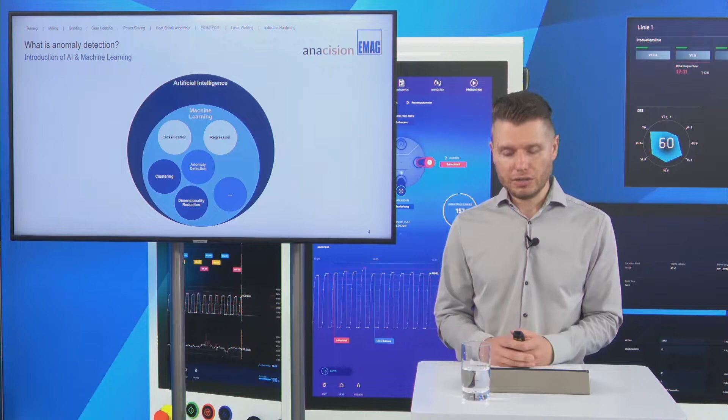Before we dive deeper into today's topic, we first have to clarify some terms related to anomaly detection, in case you don't know them already. At the very top, we have AI. AI mainly deals with recreating structures of human intelligence, for example, reasoning or perception. Within AI, we have the topic machine learning, which is about programming computers in a way so that they can learn from data. Within machine learning, we have various approaches, and one of them is anomaly detection, our topic today.

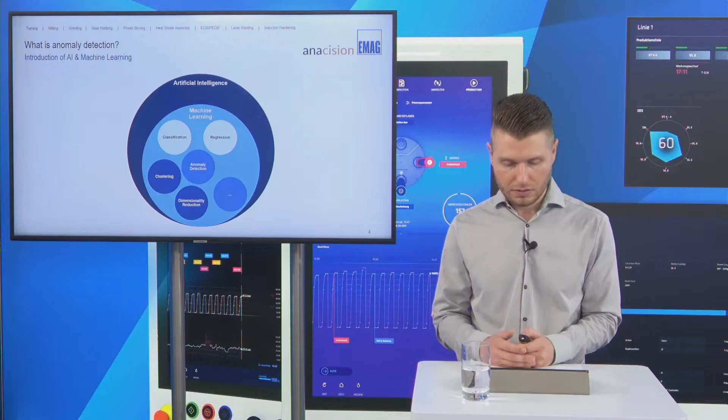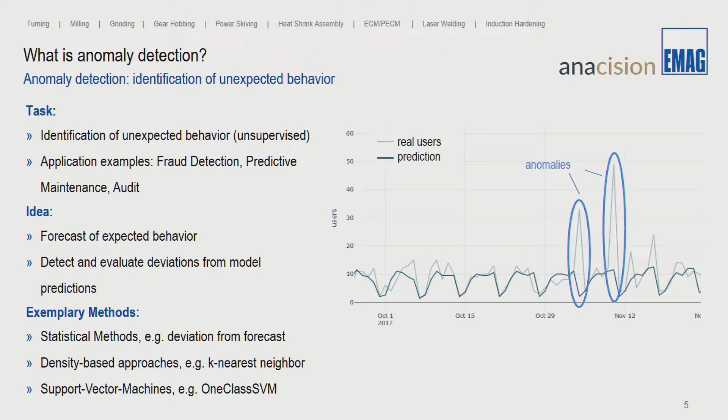But what is anomaly detection about? Anomaly detection mainly deals with detecting unexpected behavior. The idea behind it is that we want to model and forecast expected behavior and detect deviations from it. On the right, you can see an example showing the actual numbers of users of a website and the predicted ones. And you can see here two anomalies where the actual number of users is far higher than the predicted ones. This is considered an anomaly. The reason in this example could be an attention-getting social media post, which led interested users to the website.

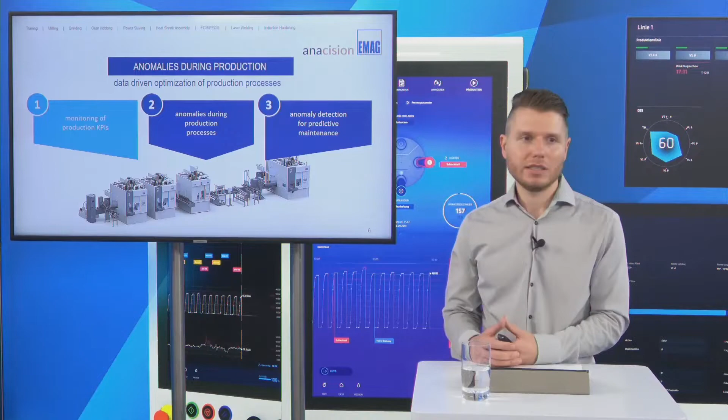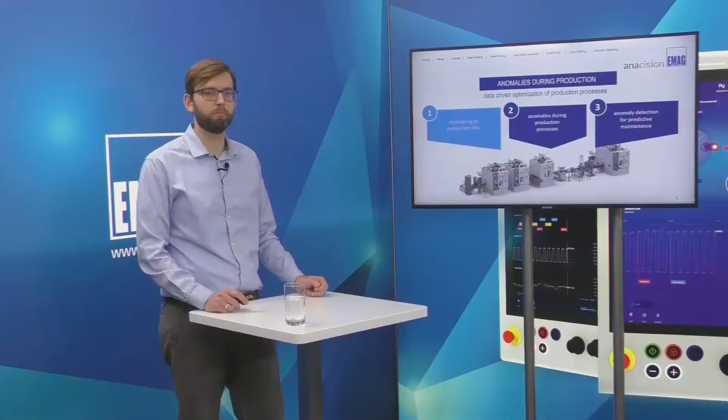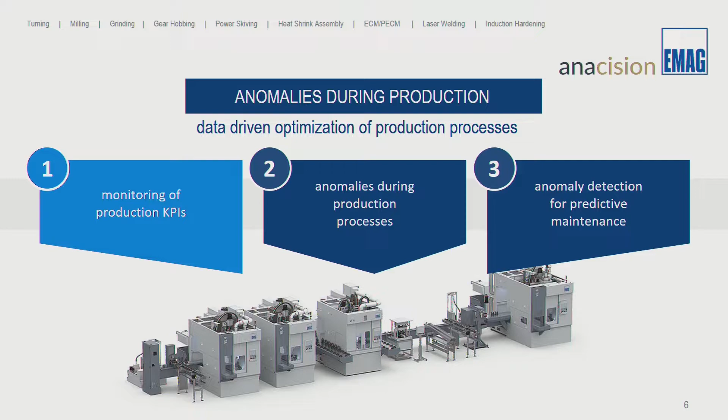Now I hand over to my colleague Andreas, who will cover the topics monitoring of production KPIs and anomalies during production processes. Afterwards, I will go on with anomaly detection for predictive maintenance. Thanks, Patrick. As Patrick suggested, we are now going a bit from the theory more into practice. So how you could use anomaly detection methods in practice in production to leverage your full optimization potential. Within this topic, we will have a look at 3 different areas. First of all, we look at monitoring of production KPIs. Then we go deeper into the production process and how you can use anomaly detection in there. And last of all, we continue with predictive maintenance approaches.

To start with, we want to introduce the common KPIs that are used in production in order to analyze the efficiency of production plants and lines. Often we talk about the cycle times or the takt time of each individual part. The part count is obviously very important, and also the target part count within a shift, for example. The quality and rejection rate of the parts, and also the machine downtime is often measured and analyzed. And one of the most important factors in production is obviously the OEE.

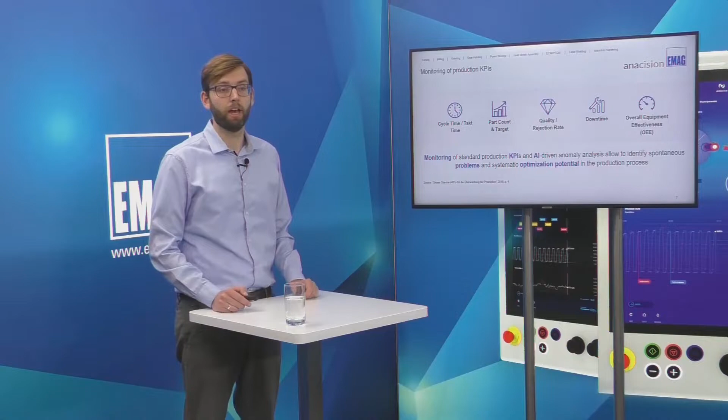Often these factors are analyzed only per shift, per day, or maybe within a week, and not in great detail. But what we want to show you in the next few slides is that if you go deeper and analyze them in more detail, using, for example, AI-driven methods on top, then you can really use these KPIs to identify problems or optimization potential in your production line, and leverage this to optimize your production processes.

So we, as EMAG, already have some software tools that can help you to calculate these KPIs directly from machine data. We offer different data apps that, for example, calculate the part quantity and also make a part quantity forecast, so which quantity you will achieve within the shift with the different production speeds. We have an OEE calculation monitor, and we also have tools that directly calculate the cycle times.

At the current stage, for example, we can visualize the data from these apps in dashboards, so that a worker in the line can directly see these effects and has transparency about his behavior, and can react, for example, if the production speed is too low. And this is also a good interface to alarm different anomalies in production processes.

We have our first question, Andreas. Perfect. Do you also offer systems which analyze anomalies live and take actions immediately?

Yes, so these apps which we just discussed, we use machine data to directly calculate KPIs first. And in some of these apps, for example, a cycle time monitor, we can directly identify anomalous takt times, for example, if the production process is too slow. We didn't do it yet in the process, but with dashboards and also with smart devices, we could alarm those so that the worker could react and see what's wrong in the machine. So yes, we are there already.

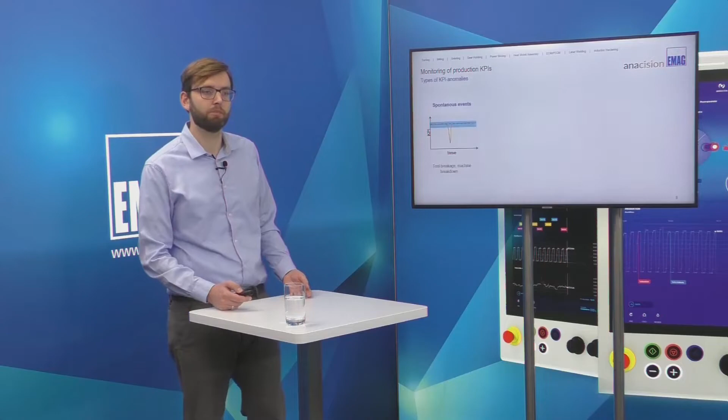Yeah. Thank you. Okay. We have these apps to calculate KPIs, but on the next step, the question is, what kind of anomalies are we expecting in practice? There are different types of KPI anomalies that we are expecting. For example, there could be spontaneous events, which could be an OEE drop when you have a tool breakage or a machine breakdown, then the machine stands still. Obviously, your OEE goes down, so it's like a one-time event.

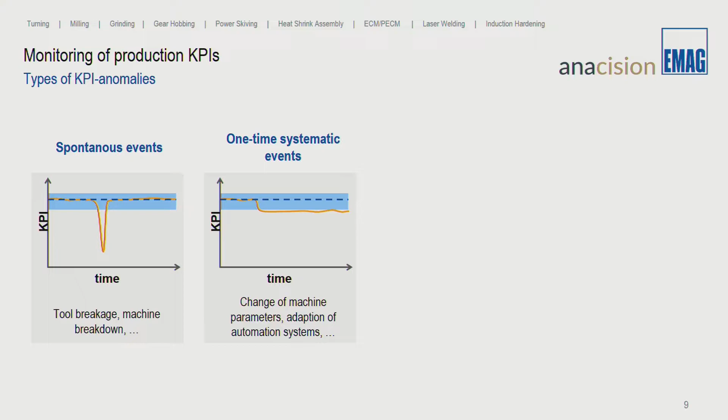But you could also have one-time systematic events. Meaning, if, for example, a worker is changing the program of the machine, or you have an adaptation of your automation system, you can either improve your productivity, or in some cases the productivity can decrease. And often this also remains unobserved because the changes happen in such a small detail that nobody can detect it without data analysis methods.

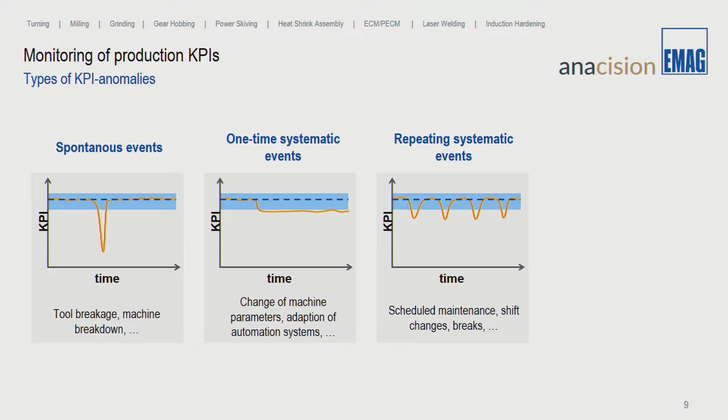Another thing which we are expecting are repeating systematic events. This could be, for example, through scheduled maintenance during a week. This could be caused by shift changes, by breaks, by shop floor meetings, and this could all have an effect on productivity.

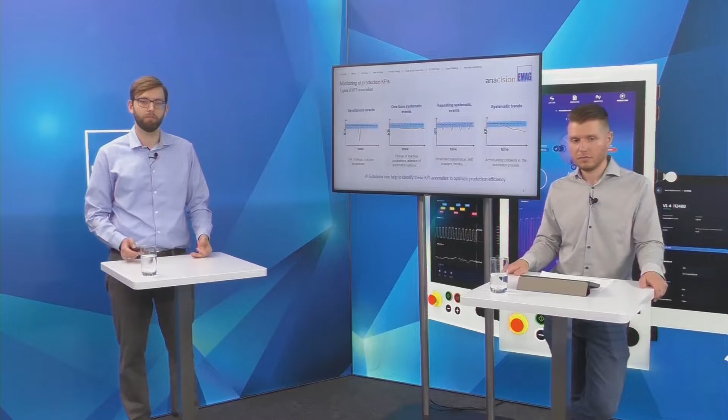A fourth example of a pattern that we might expect or can observe are systematic trends. It could also occur in KPIs, for example, if you have accumulating problems in an automation process. But most of the time, we expect such a pattern when we talk about machine wear or tool wear, when some accumulating process leads to increasing damage. And our goal now is to identify these patterns in the KPI data with advanced analysis to identify optimization potential.

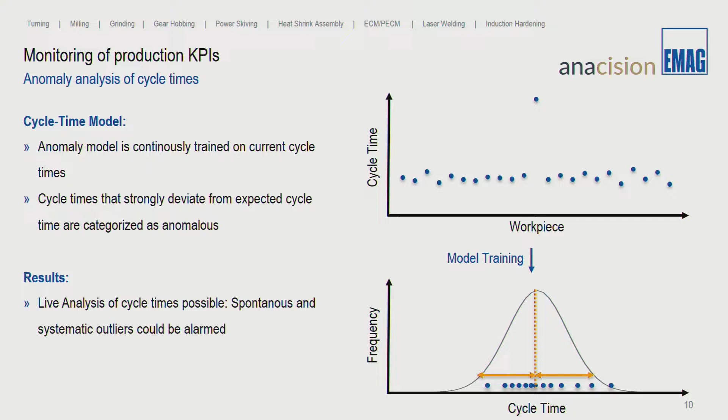So in this previously mentioned cycle time app, we train a statistical model which, based on the machine data, automatically calculates the expected takt time and also the expected deviation of the takt time. Then we can apply it on our measured data in the live system. Here we have our expected takt time and the area of deviation we expect. All the takt times in between we don't have to worry about. But if we find a takt time outside, it could be an important issue that might need to be alarmed. For example, in this case, there could be no parts available.

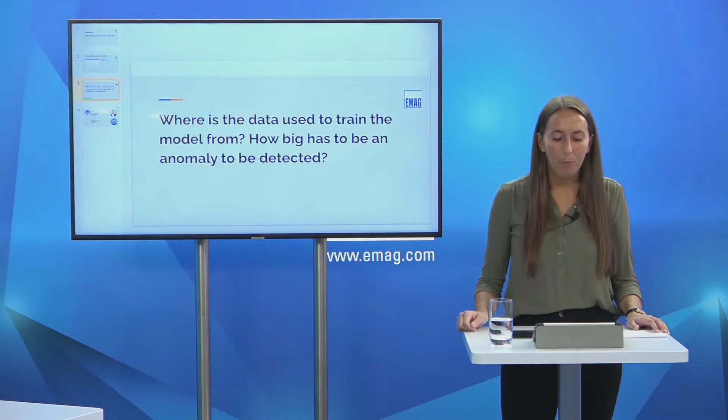Where is the data used to train the model from? How big has an anomaly to be to be detected?

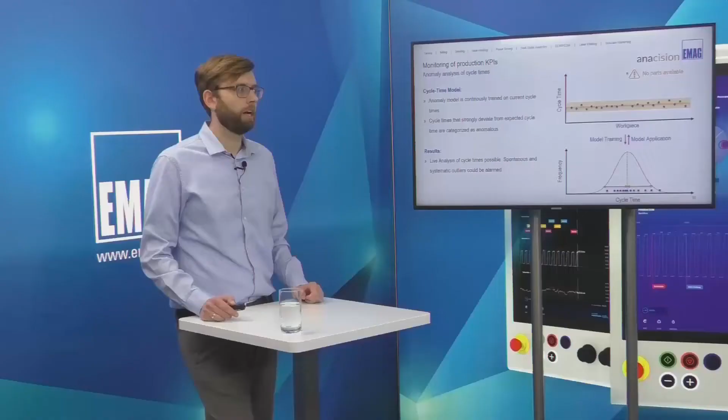The data for the apps we just discussed is coming directly from the machine. It's collected by the EMAG IoT gateway, the EDNA IoT Core. So we calculate the KPIs directly from the machine data. In theory, we could also use KPI data from, for example, MES systems, but this is how we do it. The second question, how big is an anomaly to be detected or to be important? This is a question where I cannot give a clear answer, because in practice it's like this.

So you have some statistical measures, and it is very easy to identify an anomaly in the statistical means. But in practice, a statistical anomaly might not be relevant. So often you need to have a combined set of rules, like combining statistics and expert knowledge, to tell when an anomaly should be alarmed or not. And this is how these systems are often implemented in practice.

Perfect, thank you. Okay, very good.

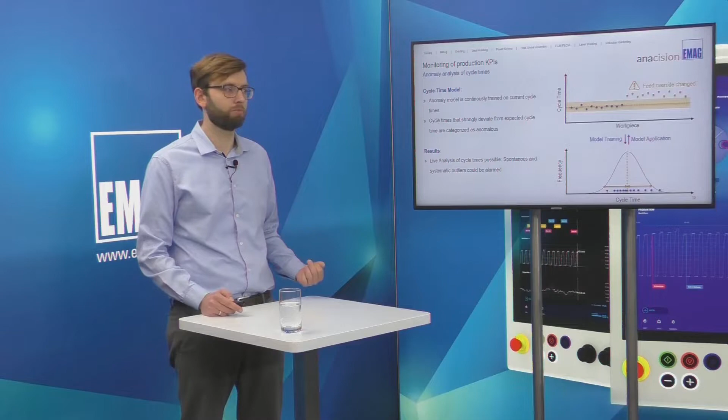If nobody realizes that and the shift produces like this all the time, then at the end of the shift we have a significant number of parts less. So there it would be really important to feed this alarm back into the process so that somebody could react and adapt again, for example if the feed override is changed, like we see in this example.

But we can not only use anomaly detection to do live analysis of, for example, cycle time or other KPIs. We can also use it to analyze historic data. For example, we took the cycle time data of 7 individual machines in a production line and looked at the distributions of cycle times that are normal, meaning expected, which we see in green, and cycle times that are not expected, meaning anomalous, here in red in this graphic.

And then we looked at what happened in the machine when we had anomalous cycle times, meaning too long cycle times. And what was very interesting is that in this case, one of the most occurring alarms in the machine was that the machine was waiting for new workpieces, like the workpiece getting caught by the robot for the next machine, or a new workpiece arriving to be produced.

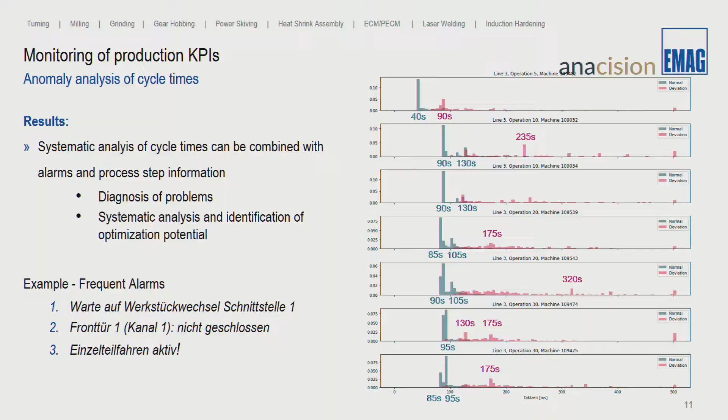And this is something where now a worker or a production line manager could think of how we can, for example, improve the automation process, with buffer bands or different programming of the robot, so that this is not a bottleneck in the production process, and thereby he or she could leverage the production potential.

With this, I want to continue with the next KPI, which is maybe the most used KPI in production, the OEE. What you can see here is the OEE over a day of production with the individual shifts, and what we calculated here is the OEE in the last half an hour. What's quite interesting is that it's obviously not constant during the production process, but there are some drops, there are some highs, and it's changing continuously.

To analyze this a bit more systematically, we took the data over the last 2 months and calculated the average expected OEE in these individual time windows. The OEE is quite good, but interestingly in the night shift it's even higher than in the early shift. Could be because in the early shift there are maybe some more shop floor meetings, so the production facilities stand a bit longer, but you can see some systematic effects.

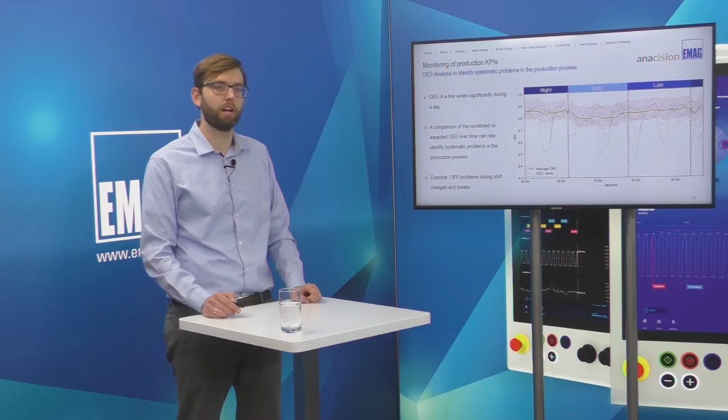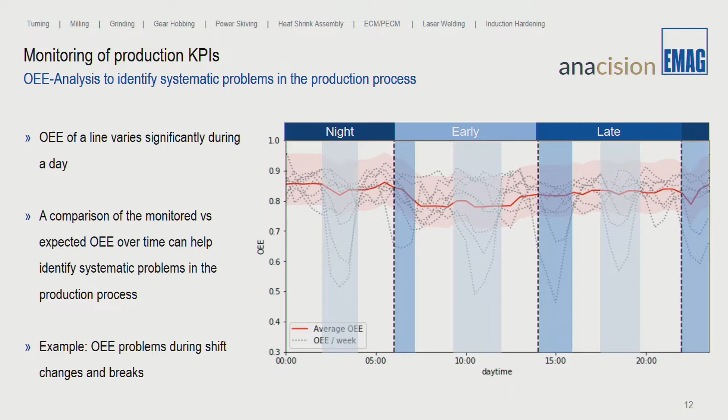But on top, when you now compare the OEEs of the individual weeks, which we did in the gray lines here, you see that some weeks they produce completely fine, but some other weeks have these outliers where the OEE drops significantly. And this seems to be a pattern, not something random occurring during the day. When you look deeper, the pattern is that you have an OEE drop often in shift changes, and an OEE drop in breaks, which could be expected, but where there's also some potential for optimization.

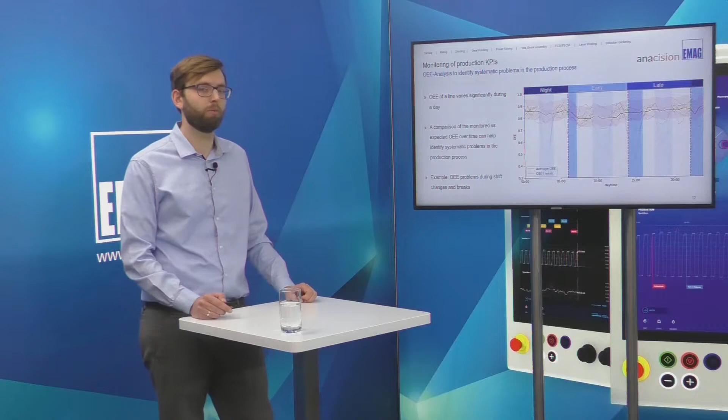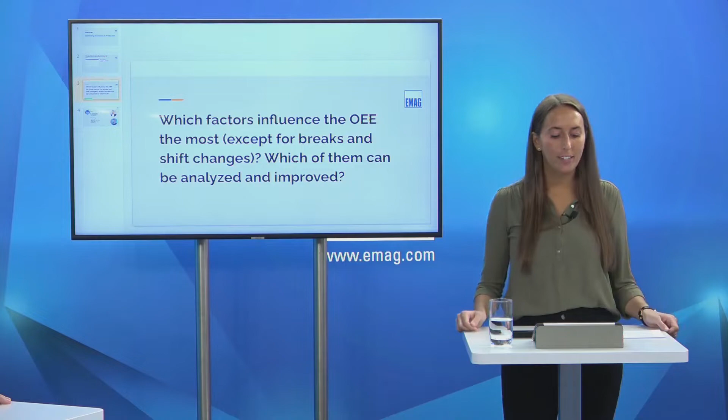We have our next question. Okay, perfect. Which factors influence the OEE the most, except for breaks and shift changes? Which of them can be analyzed and improved?

Yes, also a good question. A question where there is not a clear answer, because I think it clearly depends on the production process. In this case, we saw that more process-driven events like shift changes or breaks have a strong effect. But obviously any effect or any potential in the production should somehow be seen in the OEE, because it comprises all the different factors, from quality to availability of the machines and also the throughput of the machines, or the productivity.

So any effect you should see in the OEE, but in a second step, often what you would need to do in practice is analyze other KPIs and dig deeper, so make a diagnosis of where the origin is. In theory and also in practice, it could be changes in the program, problems with the automation system, or problems with the material quality. But it's a good starting point to identify there is a problem, and from there you can start a diagnosis. Okay, thank you.

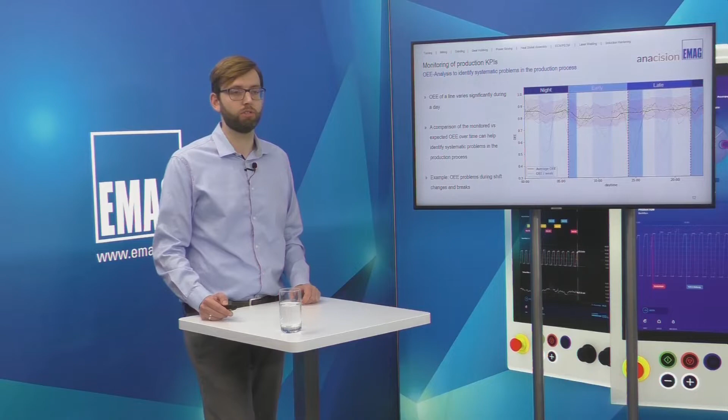Okay, then let's go back to this example. What we did next, after we identified there are significant OEE drops during breaks and shift changes, we wanted to identify what kind of effect we could have on the productivity if we change those. So we analyzed how many parts we lose during each break on average, but also how many parts we lose during shift changes. And there we saw some interesting effects: often shift changes run very smoothly and nothing happens, so the production continues and we have no loss in productivity.

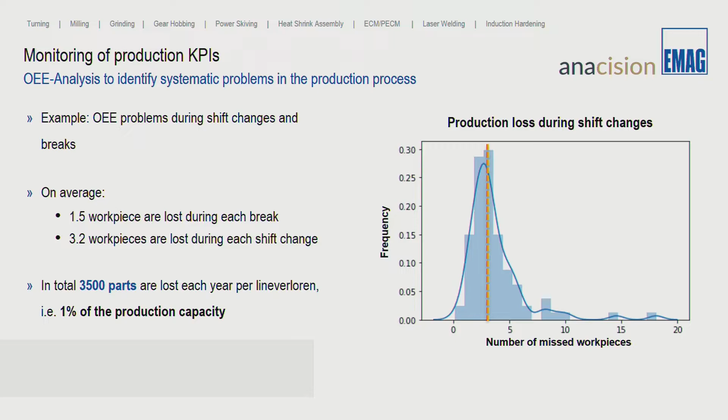But sometimes we also have breaks of 20-30 minutes over a shift change, and we lose up to 20 parts, and this is quite significant. On average, we calculated 3.2 parts we lose during each shift change, and 1.5 parts during each break. If we sum these up for the complete line, it's about 3,500 parts we lose for the whole year, and this is about 1% of the total production capacity of this line.

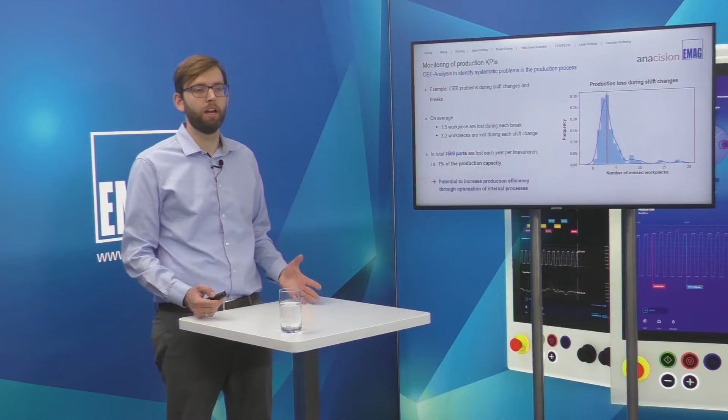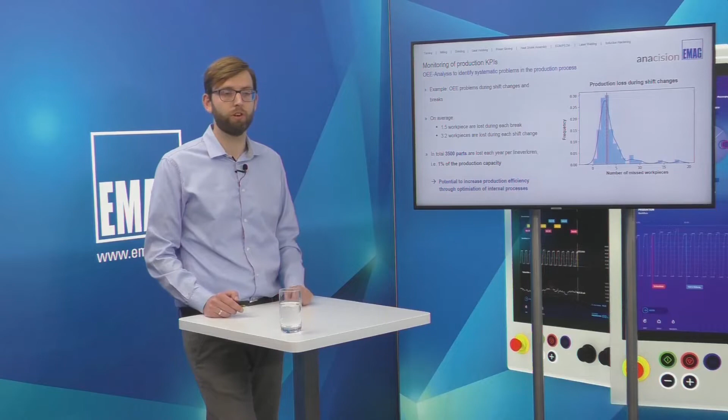And if you think about it, if you just slightly adapt your process, so you have overlapping shift breaks, or you tell your workers to prepare the tools or make a tool change earlier than the shift break, so that your production line could continue over the shift break or the shift change, then you could already achieve a significant increase in your productivity.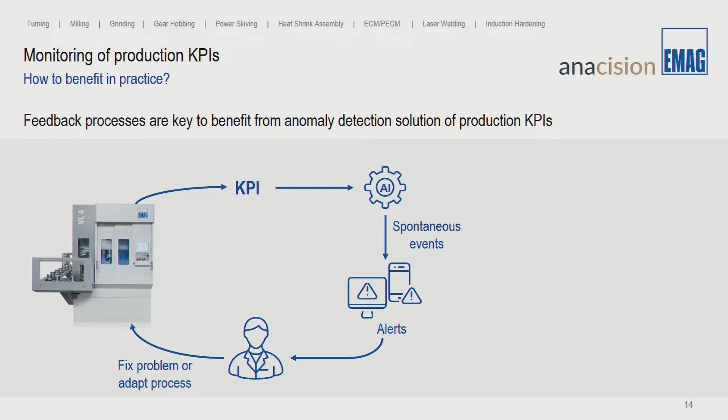To wrap this topic up, monitoring of production KPIs, how can you get this into your process? What is key in our point of view is that you not only calculate the KPIs and do the analysis we showed you, but get this back into practice. For example, for a spontaneous event, if you have AI solutions to identify them, it's really necessary that you can have alerts or warn somebody, for example with smart devices, dashboards, or a connection to your HMI at the machine, so that the worker can react and fix the process again.

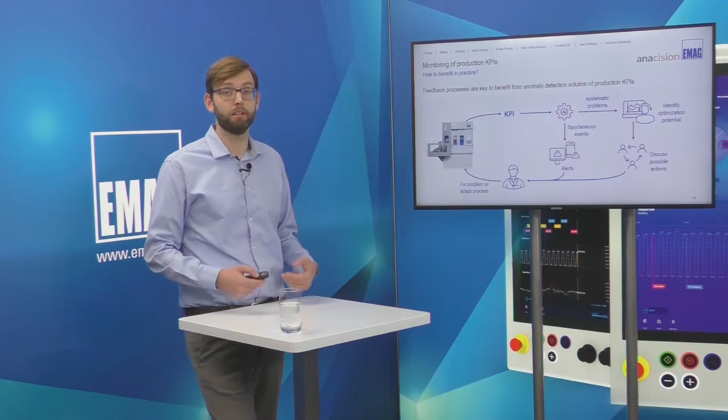If you identify more systematic problems, then obviously you need an expert who looks at the historic data of your KPIs and identifies problems and optimization potentials. Then you certainly need some discussion rounds where you think about what actions you want to take. And then you can put it back into your process and benefit from these analyses of your KPIs. Overall, with these analyses and these feedback loops between machine data, analysis system, and your process, you can improve your productivity just by analyzing your KPIs in depth.

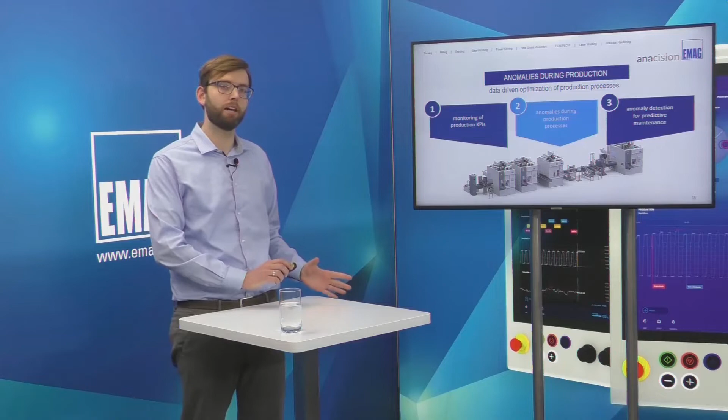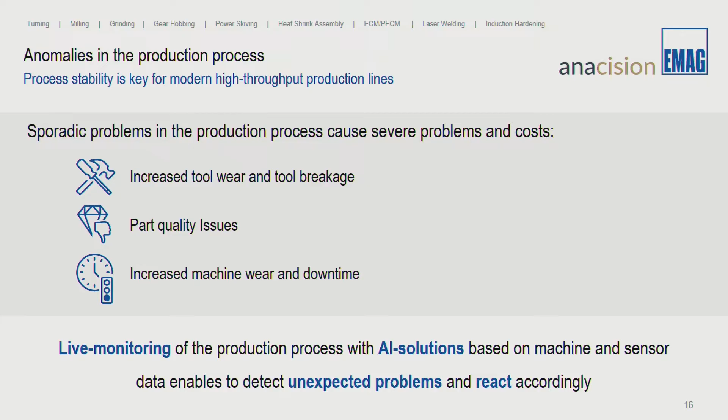Okay, from this, we want to go from KPI data more to what's happening in the process of one part. And there, anomaly detection could also play a significant role in future. Obviously during each process a lot of sporadic problems can occur. For example, you can have more tool wear than you expect, tool breakage, unexpected part quality issues, or increased machine wear and downtime. And this could be caused by several things, again, by different materials, changed parameters, and so on.

But if you don't detect them in time, in process, then you can have severe problems. For example, if you have part quality issues, you may have to throw away the parts of a full shift. That's why it would be very beneficial if you could monitor your production process and have data-driven or AI solutions to identify these unexpected problems and react accordingly.

And to show you how this could look in practice, we have one example that we implemented within the last year with an EMAG customer. The problem there was with thread cutting in a machine, which caused not-okay parts. The diagnosis showed that there were some random and transient failures in the Z-axis linear motor which were not easily fixable.

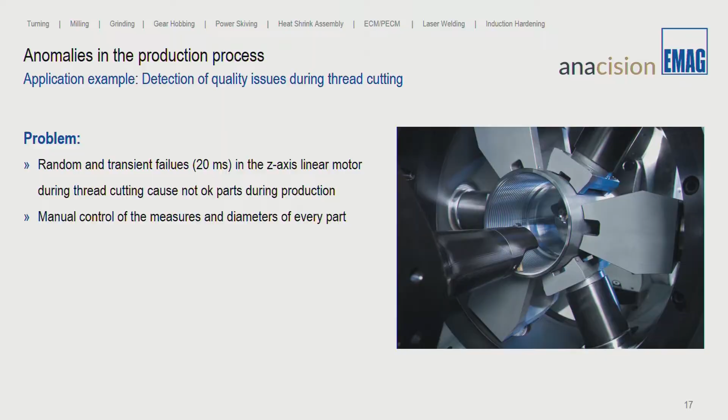What this made the customer do is that he had to manually control all parts and measure the diameters, and this obviously had some significant costs because one worker only had to do the measurement of all the parts. So the idea here was that we implement a data collection system and also an AI algorithm to, out of the data, identify these not okay parts, which are only very sporadically occurring, and also remove them from the process. To achieve this, we did 3 individual steps.

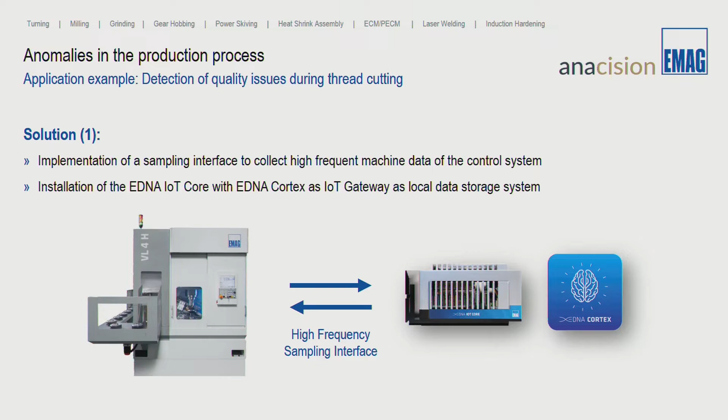So in the first step, we needed to get the data from the machine. For this, we used the EDNA IoT Core and the EDNA Cortex as an IoT gateway, and also implemented a specific sampling interface that was able to collect high-frequency machine data. This was necessary because, as I quickly mentioned in the previous slide, these failures in the Z-axis linear motor were only very transient, so 20 milliseconds. So the normal frequency we could get was not enough, so we implemented this high-frequency sampling interface.

With this system, we started collecting data from the machine, and after we had data from 1 or 2 weeks, we started to develop an AI algorithm. The AI algorithm had the goal to identify these not okay parts based on this machine data. So in the first step, we needed to identify each individual cut of the thread cutting because it was 12 repeating cuts. This we did with a segmentation approach, which you can see on the left side. And from this, we got the data of each individual cut.

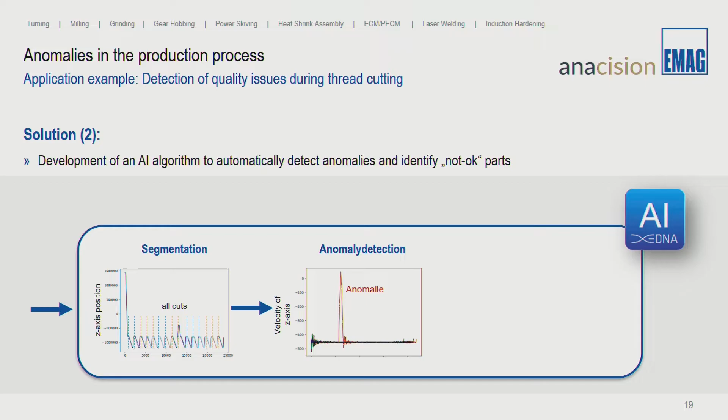In the next step, we calculated the velocity of the Z-axis, looked where there were anomalies in the velocity, and also quantified the strength of these anomalies, which here is shown in the red signal. And then in the last step, we developed a machine learning model that was able to identify okay and not okay parts based on these quantified anomalies.

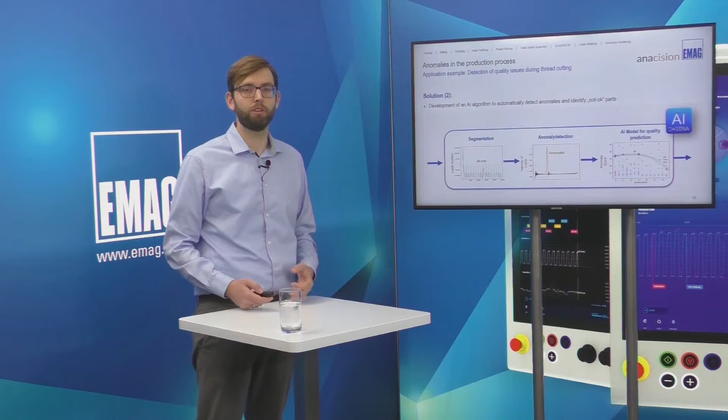And this AI solution we then installed directly at the machine. So we now had the machine that was producing. We also had the IoT gateway that was collecting the high frequency data, and then the AI solution directly in process analyzed the data of every part, made a prediction if the part is okay or not okay, and gave the signal back to the IoT gateway.

But now the last and maybe most important step was to also get the information back into the process so that the worker could react. And for this, we also implemented a way back to the machine control. So what's happening now, if the algorithm identifies a not okay part, the part is excluded from the process automatically. The worker is alarmed by an additional light which was set up in the machine, and he now can confirm in the HMI that there is a part excluded and start the process again. Like this, we made sure that all not okay parts were removed from the process and the manual measurement was not necessary anymore.

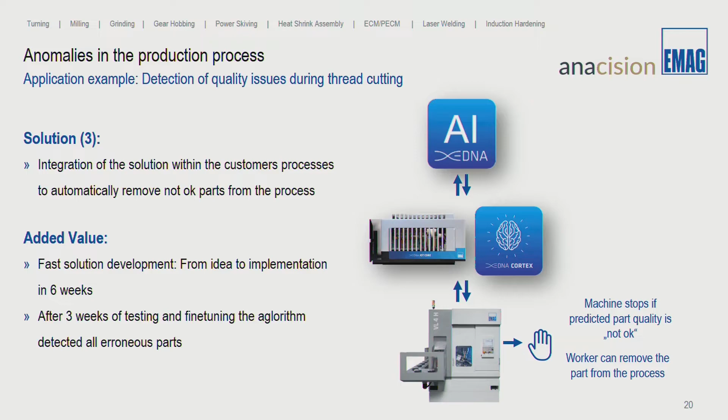How reliable does anomaly detection work? Do you guarantee certain detection rates? Yeah, thanks. Also a good question, to which there cannot be a general answer. So in this case, what we just showed, we had a very good detection rate, meaning we did not miss any not okay part for this specific problem, which was necessary to get rid of the manual control. So this was very good.

In other cases, this needs to be discussed. How difficult is it to identify the problem? If it's a very specific problem or specific anomaly, the detection rate is for sure way higher. If it's a non-specific one, then the detection rate will get better with feedback, which I will also talk about in the next slide. So maybe I get back to it.

Okay, thank you. Okay, thanks.

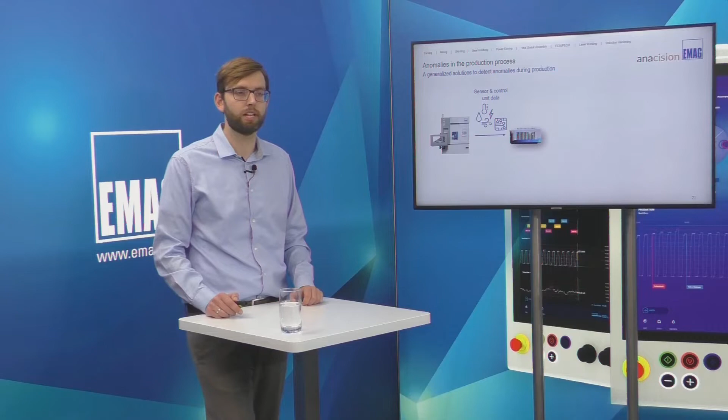Good. So as I said, this was a very specific example of anomaly detection within a process. In general, such a system could be very beneficial because, as mentioned in the beginning, there are a lot of different and sporadic problems which can cause a lot of problems and also costs within the production. So what could be a general solution is that with the IoT gateway, we collect different machine control data and also sensor data, and then develop an AI algorithm which matches the data for each workpiece and which includes an anomaly model. This anomaly model must have the capability to represent the good data of a workpiece.

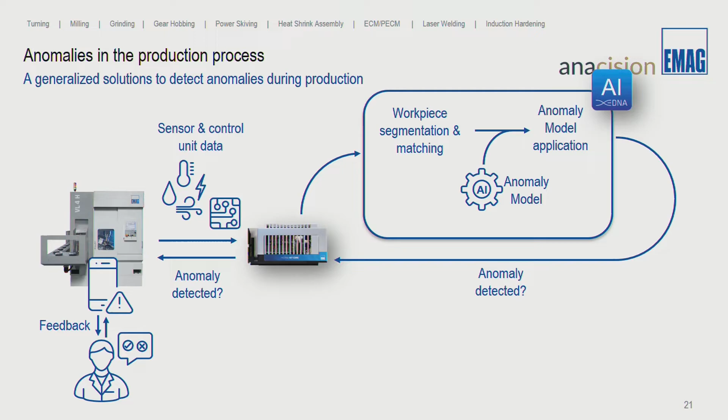And then having this capability, it can identify which workpiece is okay and which workpiece is not okay, and give this again back to the machine, for example, to the HMI or a dashboard to smart devices. But what's now key here is that we also need feedback. For example, if we say there was just an issue in the production process, please worker have a look, then it would be necessary that the worker also gives feedback. Yes, this was a problem or not. And this could be, for example, directly implemented with an HMI.

On top, we think it would be quite beneficial if there's also a second layer feedback where, for example, an expert can have a look into the recent anomalies that were detected by an algorithm, can say yes or no, this was really an anomaly, what was the cause? Okay, we had a tool breakage, we have a parameter change, we have some material issues, and what was the effect? We had some quality issues, we have tool breakage, increased tool wear or crashes.

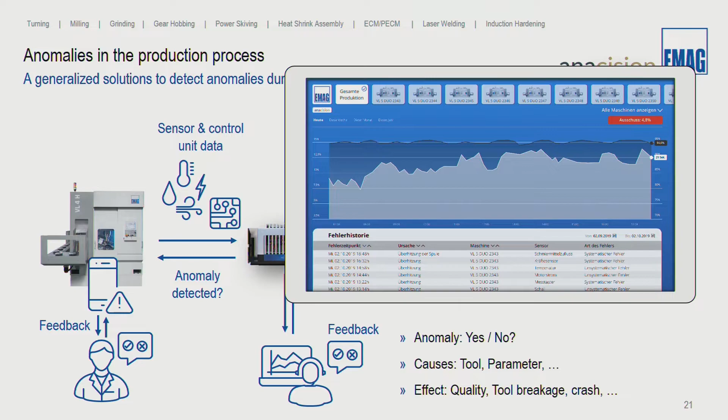And with this information, if you feed this back to the algorithm, then we can always continuously run model updates so that the algorithm gets better and better, gets better detection rates of anomalies, but can also start diagnosing which anomaly could have which effect, maybe quality issues, crash, or something else. But in practice, this could be a system which could be very beneficial, and it's certainly something that will be seen in future.

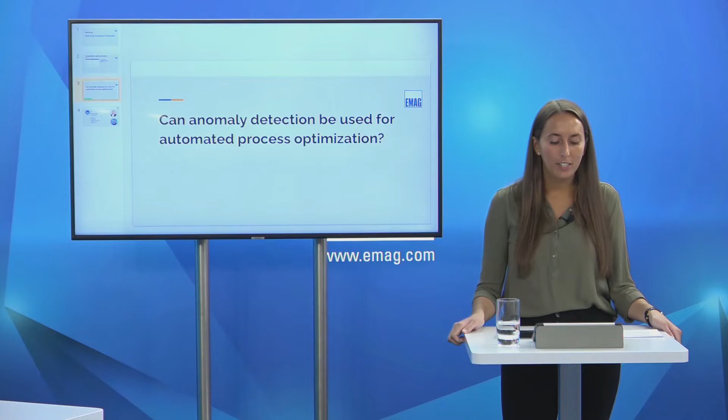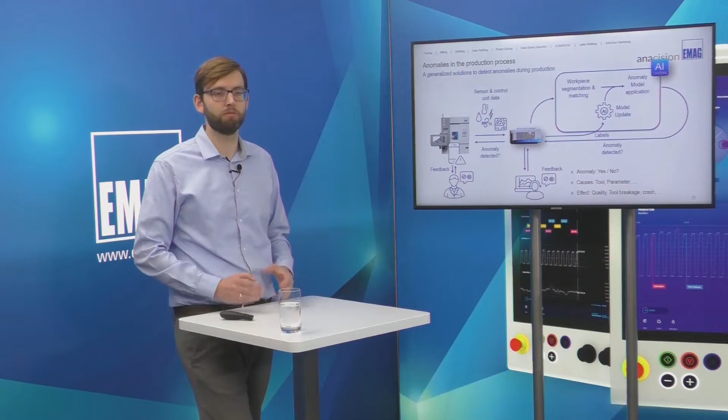Can anomaly detection be used for automated process optimization? In theory, yes. I think if, for example, a specific anomaly, for example in part quality, is identified and you can fix it with changing a parameter or correction value, then you could do this. But in practice, I guess we are at least 2 or 3 steps away from this, so that, for example, anomalies get detected and the AI algorithm directly steers back and automates the machine. There are some specific examples I know that are working in practice, but a general solution doesn't exist.

Okay. With this, I also want to close these first 2 topics and give over to Patrick, who will talk about anomaly detection for predictive maintenance. Yeah. Thank you, Andreas. To begin with, when do we refer to predictive maintenance?

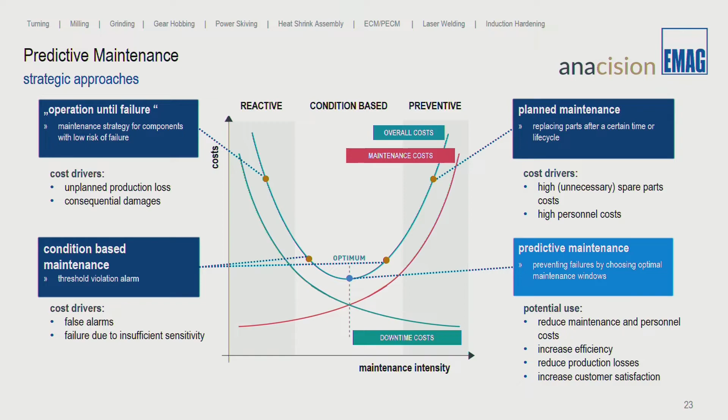Normally, we can perceive 4 different strategic approaches to do maintenance, which can be classified by the dimensions maintenance intensity and cost. The green curve here depicts the downtime costs, and the red one the maintenance costs. The turquoise one shows the combined costs where we can range these strategic approaches. As you can see here, to get the lowest possible combined costs, a company has to aim for predictive maintenance.

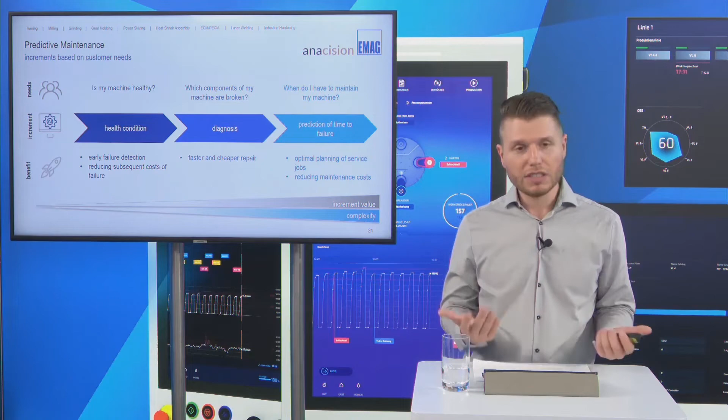In addition, the slide here shows the importance of choosing an increment of predictive maintenance based on the customer's need. The reason for this is simple. The higher the increment value, the higher the complexity of implementation. For example, if a company only wants to know if the machine is healthy or not, as it takes its own measures, probably assessing the health condition of the machine is enough.

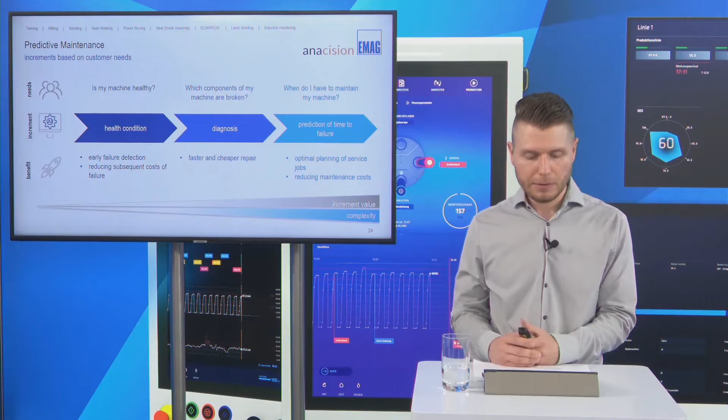On the other hand, if the company wants to know the point in time to do maintenance, it probably should go for the last increment. However, this largely depends on the availability of data and it's not always possible to get the last increment value here.

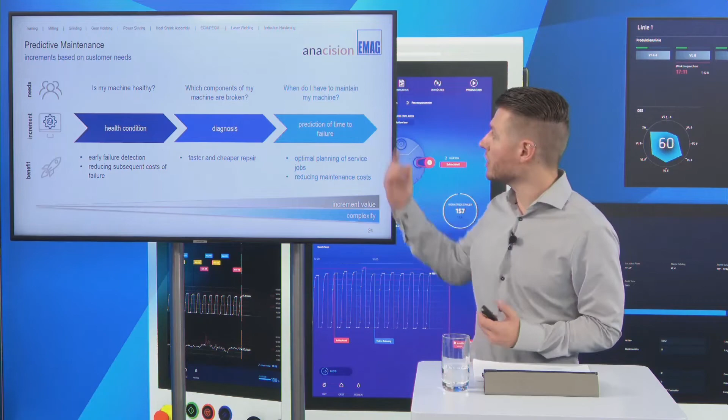As an application example, I will now expand on our EMAG AI-based solution, EDNA Health Check. This product allows, on the basis of vibration measurements, the assessment of the machine condition. We call it health condition, in reference to machine components, for example, the feed drives. To do so, sensor data is collected from every machine and then analyzed by our cloud application.

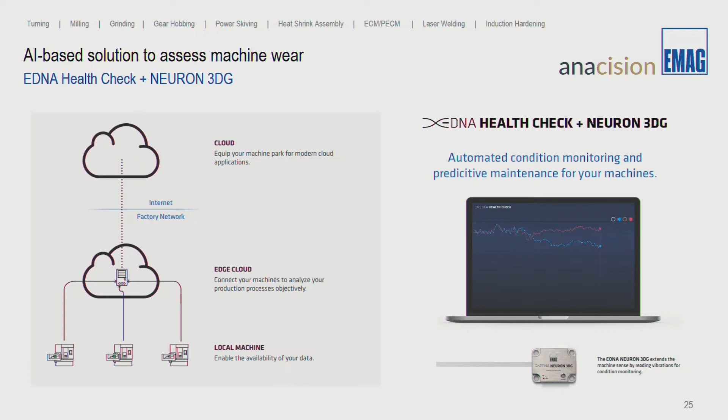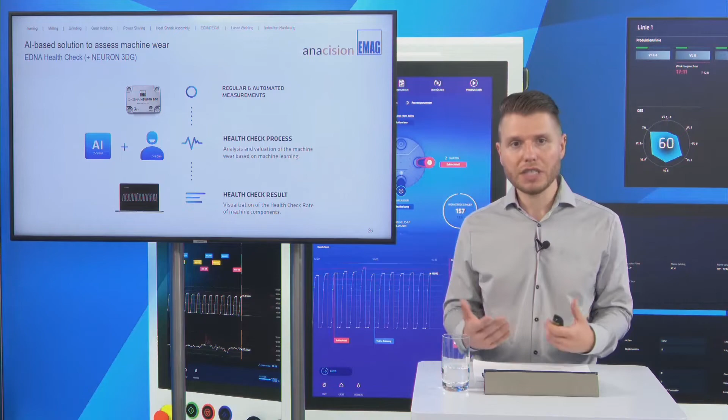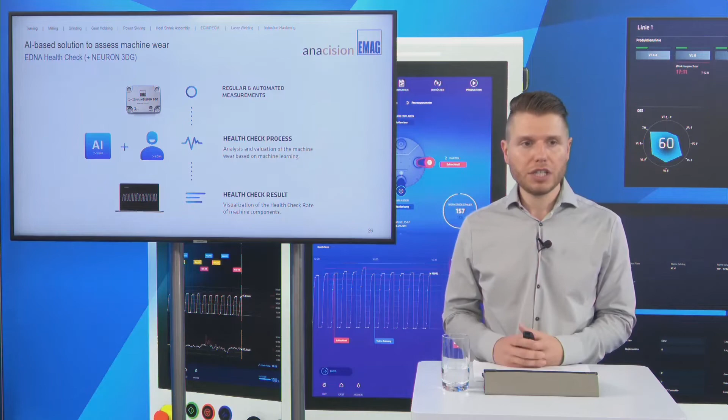As shown here, the first step of the EDNA Health Check is the assessment of the measurement. So a measurement is made, of course automated and on a regular basis, for example, once a day during lunch break. After that, the health check process is carried out. That is the analysis by our AI algorithm, supported by our EMAG service expert knowledge. But more info on that in a minute.

And the last step is the health check results visualization, in this case to relate the results to historical data in order to detect trends, for example. But I will also come back to this in a minute.

What is required to install such an analysis system? Good question. To install our EDNA Health Check, you need, of course, the vibration sensor. In this case, we call it the NEURON 3DG. And as a basis, our IoT gateway consisting of the EDNA IoT core and the EDNA Cortex. Okay, thank you. And can you also tell where the algorithm runs, in the cloud or on a local PC? The algorithm runs in the cloud. Perfect, thank you.

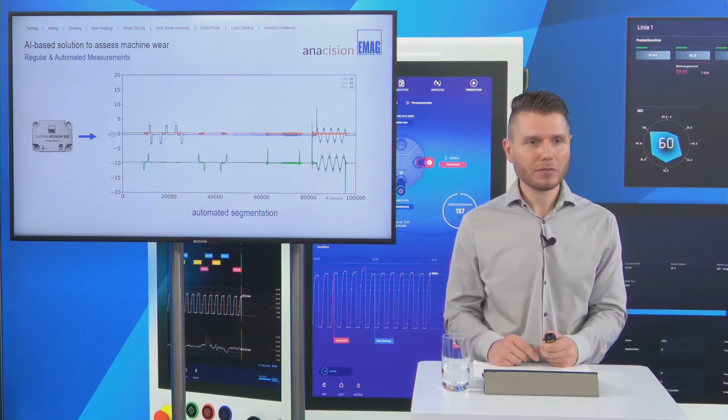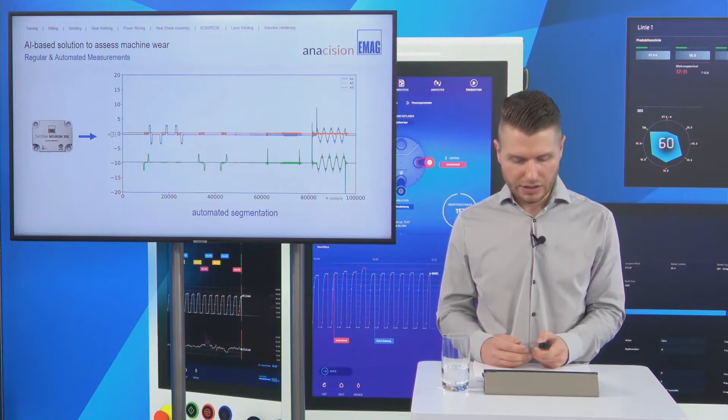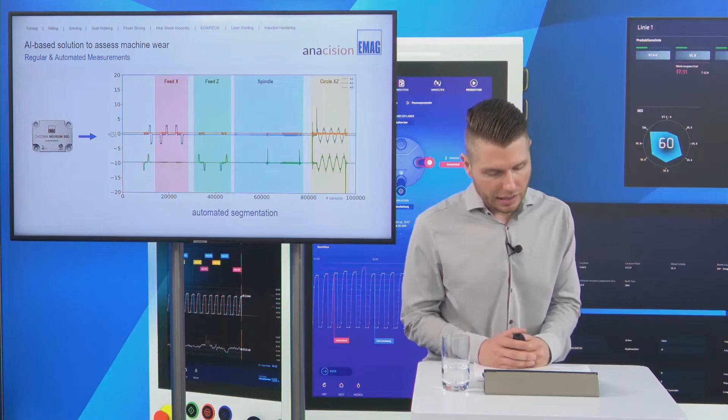Okay, then I will go on with the next slide. So, as I already mentioned, first of all, a measurement is made. After recording this measurement, the algorithm applies a so-called automated segmentation step, as can be seen here, in order to get the single segments, for example, the segment for the feed test in X direction or the spindle test. And these segments are then analyzed individually in the next step.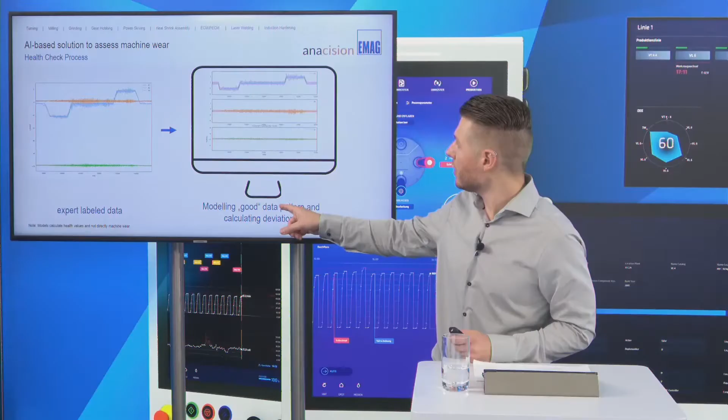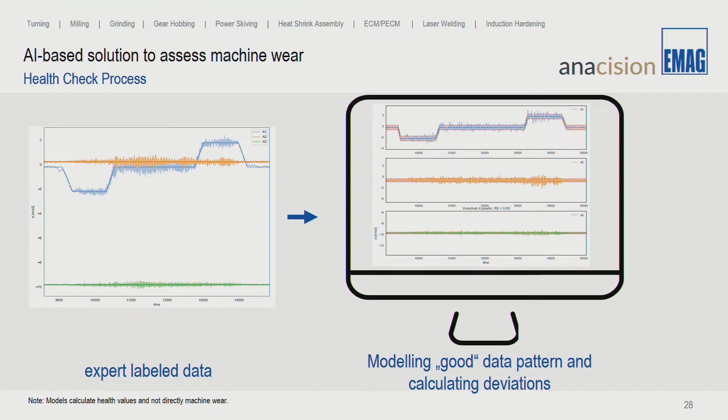Now, the main part of our health check algorithm is called into action by feeding the algorithm with historical and expert labeled training data or measurement data. Ideally, this data represents a broad range of different conditions in terms of health or machine wear. And this historical data is then used to determine the allowed deviation from a good data pattern, which was modeled beforehand, as shown here as the dashed line. This modeled good data pattern normally represents a condition with no vibration at all.

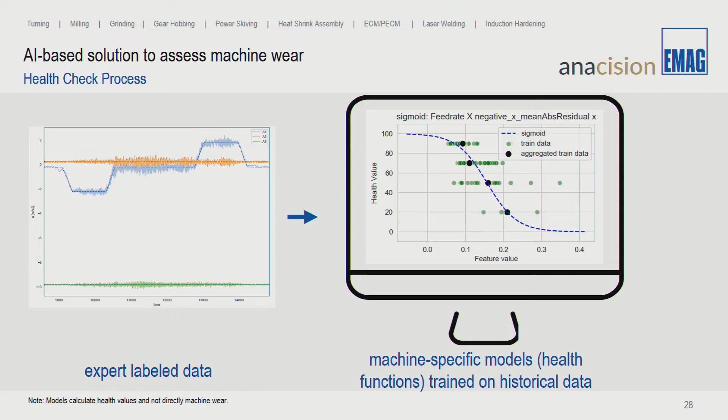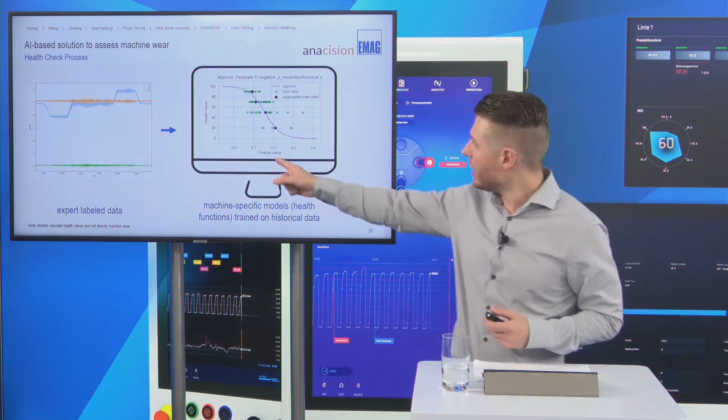After that, we can relate or map the calculated deviations, we call them in this case feature values, to corresponding health values by fitting a so-called health function, in this case a sigmoid function, as can be seen here. This means basically the higher the deviations, expressed here as feature values, the lower our calculated health value. These fitted health functions or models can then later on be adapted to single machine types or single machines with further historical data.

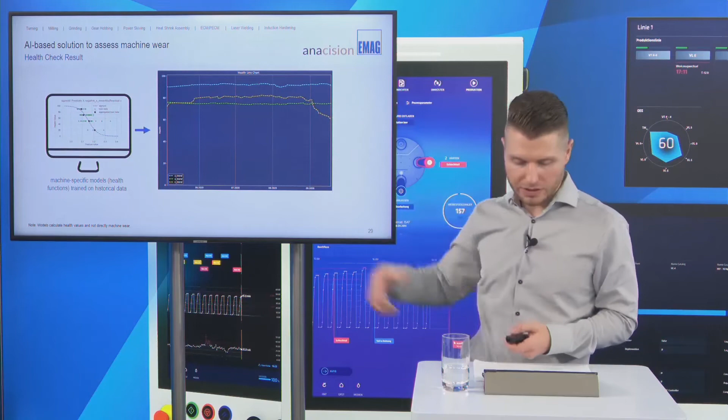In the end, we can use these generated models to get the health condition of the machine's axis and visualize them, for example, in a line chart, as can be seen here. In this way, we can detect possible trends, which may indicate a critical machine state and provide recommendations in such cases. How are conspicuities or anomalies detected in the health line chart?

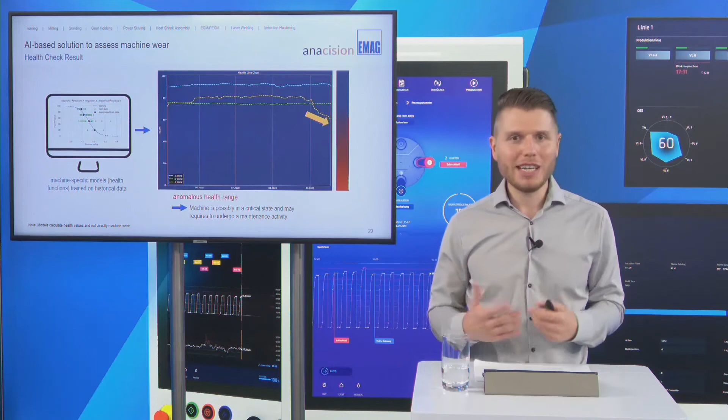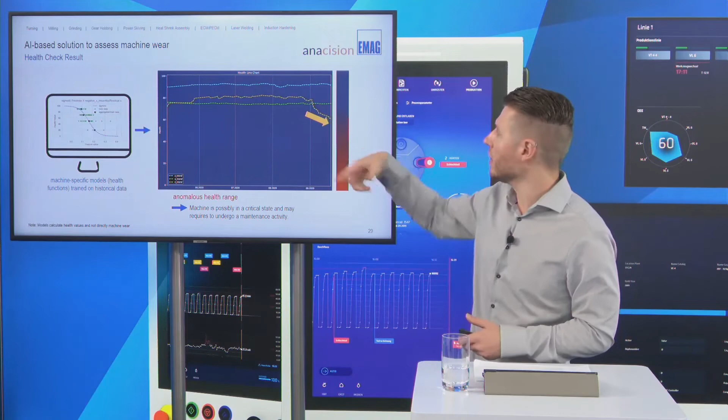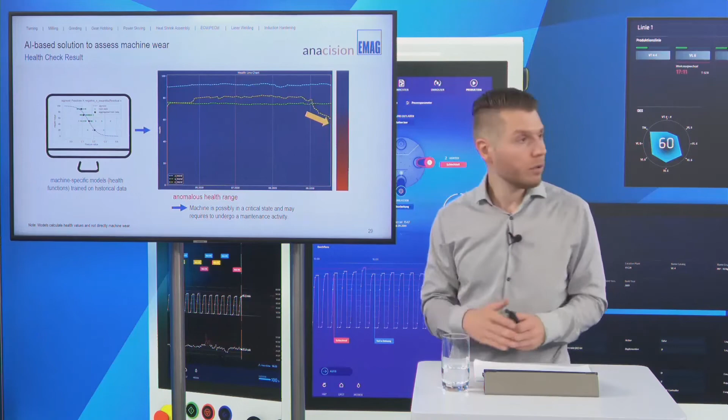So right now we are applying a 3-level monitoring. So we look for an absolute threshold, for example, here at probably 20% health. And if we exceed this health limit, there will be an alarm for our service experts. We can also check for the trends, for example, over the last 5 measurements. We can say if the health decreases about 2% on average, this maybe is a conspicuity and we have to look deeper into it.

Or we can also compare the prior prediction, the prediction from yesterday, for example, to the current prediction and show if there's a deviation of, I don't know, 20%, for example, and we will have an alarm in this case. Okay, thank you. And can you also tell us who evaluates the results? Does EMAG support here? That's a good question. I will come to this in my next slide.

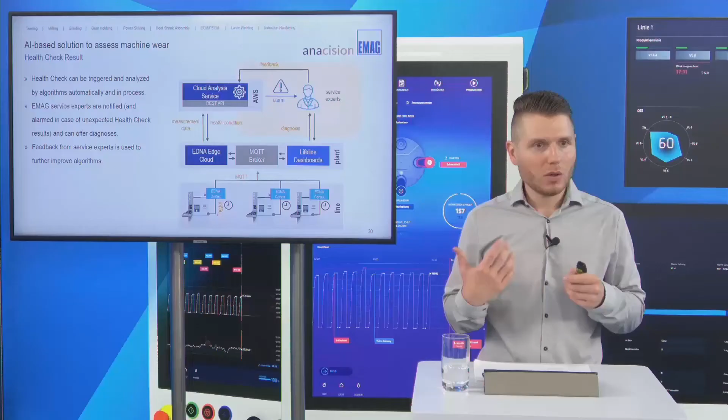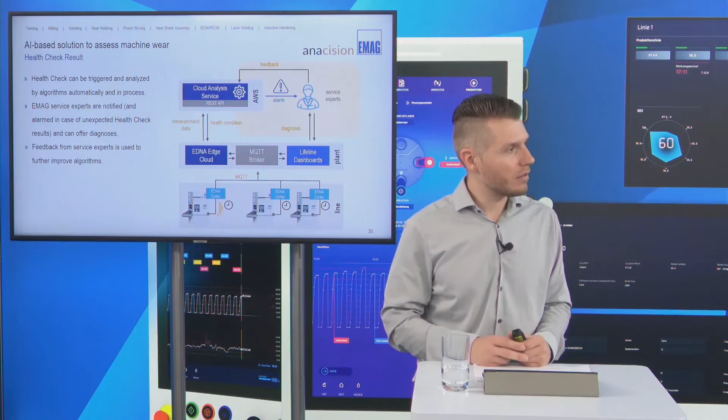The health check is triggered automatically and in process to minimize cost and effort. And our EMAG service experts are also getting notified about the results and provide assistance, for example, by offering diagnoses. So to answer your question, we largely depend on the knowledge of our service experts who can elaborate on our algorithm results and offer, for example, diagnosis, as I already mentioned here. Perfect. And to summarize, we also use this feedback from the service to further improve our algorithms.

Okay, and we have another question. How long does the process take from notification to diagnosis? So normally we talk about minutes. However, if we have a very complex case where the service expert has to offer an in-depth diagnosis, this will take a little bit longer. So on average, we talk about 30 minutes from notification to diagnosis. Yes. Okay, perfect. Thank you.

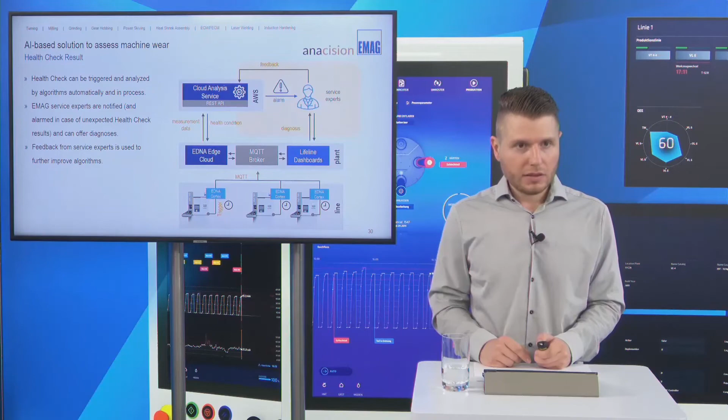So the second and last example here shows how we can also use the algorithm and its results to specifically support our EMAG service experts in making diagnoses and fixing found problems. We also had a case at our customer that showed that the spindle health was on a rather moderate level. To find the cause, we also looked at the measurement in the frequency domain, as shown here. And we were able to detect a so-called inference frequency.

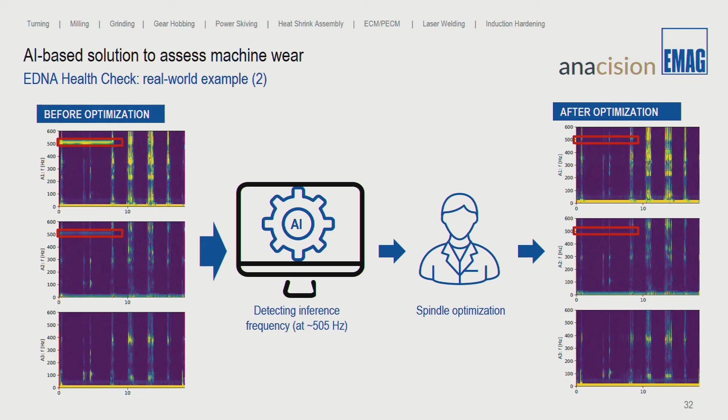We have our next question, yes. Patrick, in which cycles will the algorithm be updated? What about the update policy? So the update policy largely depends on the machine type or the machine. So do we have enough data for this machine? How good are our models already? Therefore, I can't fix it on a certain number.

But the main advantage of our cloud application is that we can deploy updates very fast, so we do not have to be on-premise at our customer to apply updates in this case. Okay, thank you.